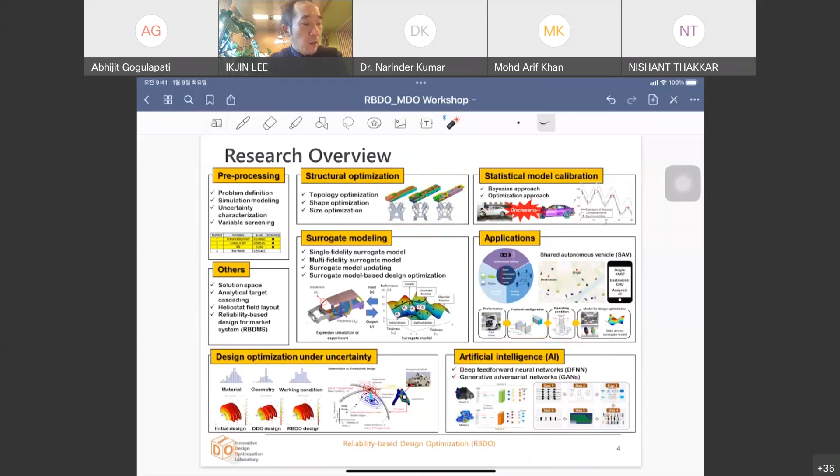But basically, we will focus on this design under uncertainty today. This overviews the RBDO process. When we perform RBDO, we need these four steps.

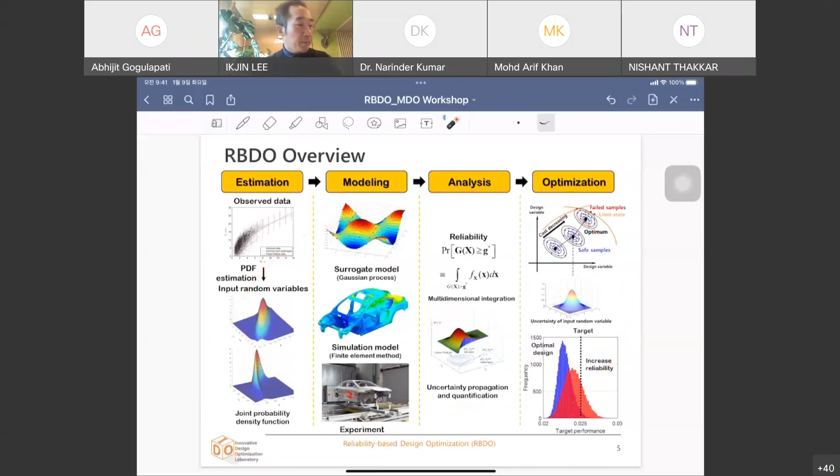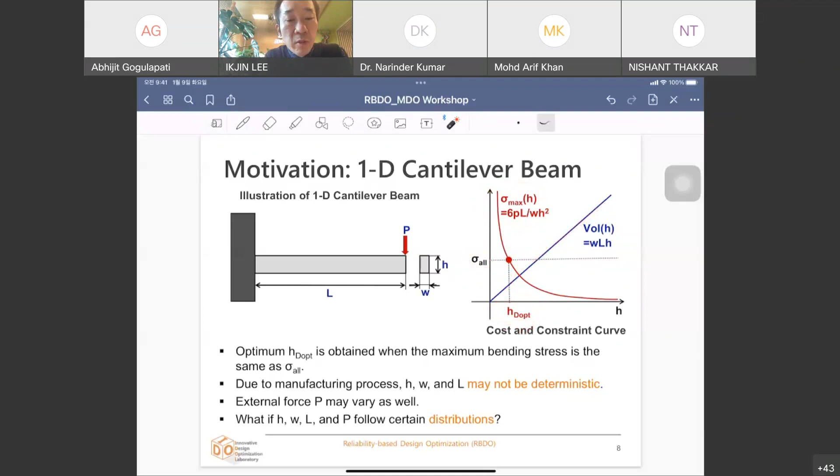However, due to manufacturing process, this H, or W, or L may not be deterministic. So even if we say H is like 1 centimeter, if we actually manufacture this beam, then the actual height could be different from 1. It could be larger than the target value, or it could be smaller. If the actual height is smaller than this target value, then the stress at that point is larger than the allowable stress, so that design is failed.

So in actual cases, what if this parameter or variable follows a certain distribution? If we assume this height follows a normal distribution like this, then this variable is called a random variable. Random variable means we can define a variable that follows a distribution. So here we have only one design variable H, and it follows this kind of normal distribution.

That means if we make infinitely many of this kind of one-dimensional cantilever beam, then 50% will be failure and 50% will be success. So this design has 50% failure and 50% reliability. The reliability of this product will be 50%.

So this is actually the motivation of RBDO. Reliability-based design optimization, RBDO, is necessary to satisfy a certain level of product reliability. 50% may not be enough for the reliability of this kind of product. So what if we increase this reliability to like 95% or 99%? Then how can we perform design optimization under that target? That's the purpose of RBDO.

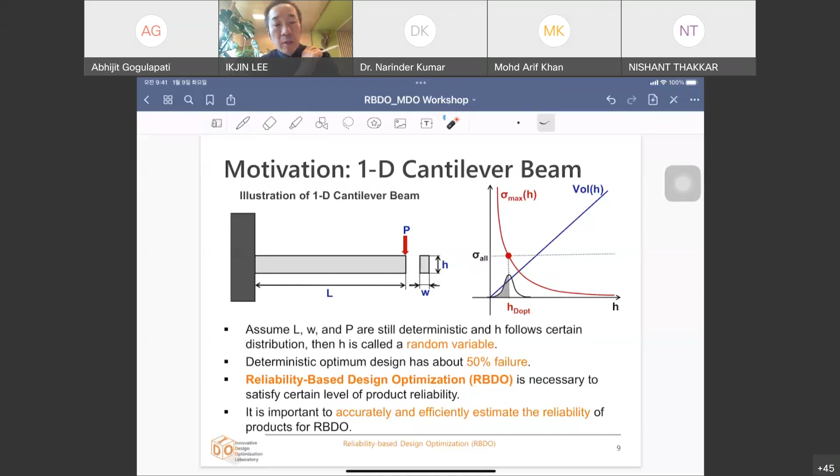To apply the RBDO concept in this one-dimensional cantilever beam, this is the current design. To minimize or reduce this failure, we know we have to shift this design to the right, meaning we have to increase the height of the beam so that the failure is reduced.

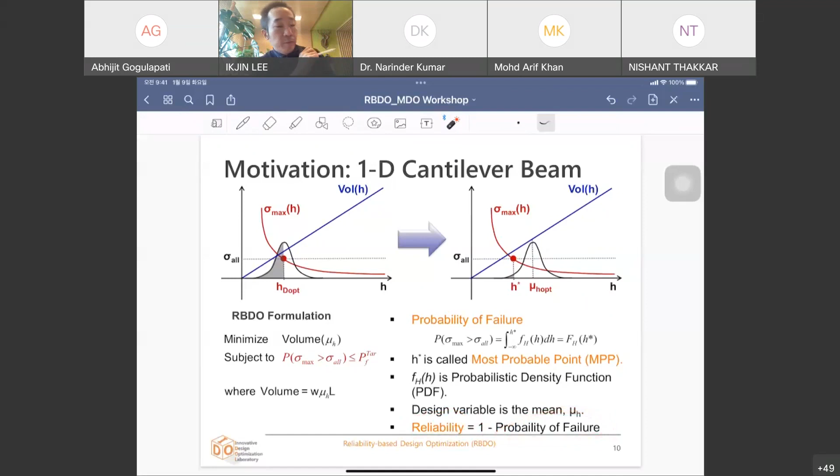So this is a one-dimensional example. We can easily obtain this as a one-dimensional, analytical problem. But for general application, we have to generalize this process.

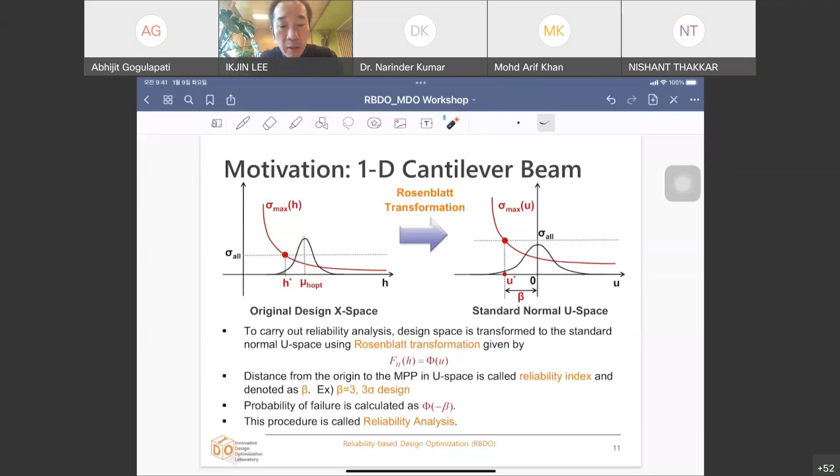So because of this kind of uncertainty existing everywhere, we have to consider these uncertainties to guarantee the target reliability.

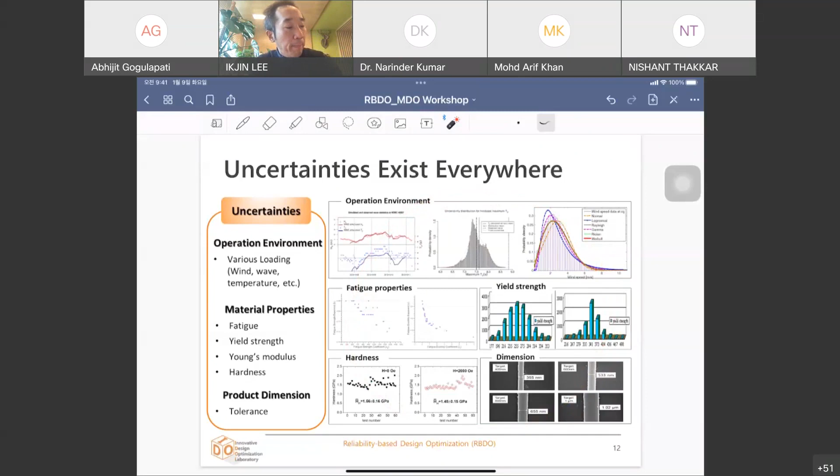This is just an enlarged figure from the previous slide. The fatigue strength coefficient and exponent, and the fatigue ductility coefficient and exponent, are uncertain - each coefficient or exponent follows a certain distribution. Also, these two random parameters are correlated, meaning when one increases, the other decreases. So they are correlated to each other.

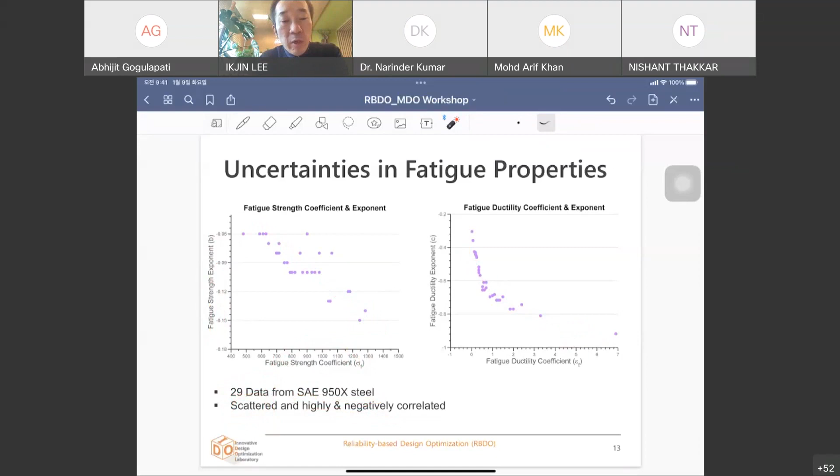This is actual data, 29 data points from this material, SAE 950X steel. We can see it is scattered and highly and negatively correlated. So we have to consider this correlation as well to obtain an accurate reliability estimation.

This slide shows that even if we don't consider correlation, the result could be different. We're dealing with the same fatigue material result. If we don't consider this material property correlation, the actual data, shown as a red dot, is different from the simulation result, shown as a gray line. But if we consider this material property correlation, the gray line and the red dot match each other. So we have to consider this correlation as well. In summary, we have to consider this statistical input property to accurately perform reliability analysis.

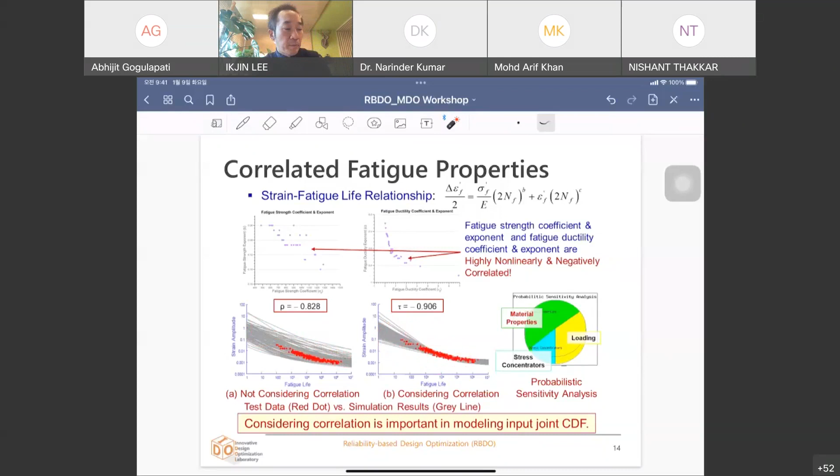This is a comparison between the safety factor approach and the reliability-based approach. The safety factor approach is a widely used design approach, while reliability is a relatively new design approach. To guarantee reliability, the safety factor approach introduces a safety factor or safety margin. This safety factor approach is a deterministic design approach, introducing a safety factor or safety margin to guarantee a reliable design.

However, the main problem of this approach is that the safety factor is obtained through experience. From experience, we can say we could use a safety factor of 3 for the design of this product. But if we have to design a new product, since we don't have any experience, we may not have an accurate safety factor estimation. In that case, we cannot accurately estimate the reliability of the product. This safety factor is not mathematically obtained, it is obtained by experience, so it doesn't guarantee the target reliability of the product.

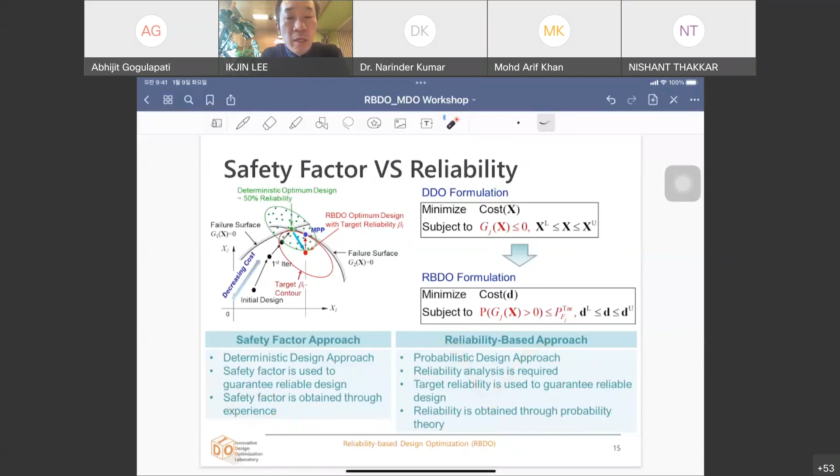However, in the reliability-based approach, we are using a probabilistic design approach, and reliability analysis is required. If this reliability analysis result is accurate, we can guarantee the reliability of the product. Target reliability is used to guarantee reliable design, and this reliability is obtained from probability theory, which means mathematically we can obtain this reliability, not from experience. So this is a more advanced, mathematically advanced approach.

Since we overviewed the motivation of RBDO, let's move to reliability analysis.

Concept of reliability analysis: let's consider this simple shaft example. When a performance function reaches a certain threshold - here performance could be stress, fatigue life, or other mechanical performances - if a performance reaches a certain threshold, the state of the component or system will change from safety to failure. This threshold is called the limit state.

If we use a threshold of 0 as a limit state, that means g of x, where g means performance function, g of x equal to 0 divides the random variable space into safe and failure regions. We define failure like this: if the performance function is greater than 0, the product is considered unsafe or a failure. So g(x) equal to 0 is called the limit state function. Here, 0 is the limit state, the performance function divides the space into two regions: safe region and failure region.

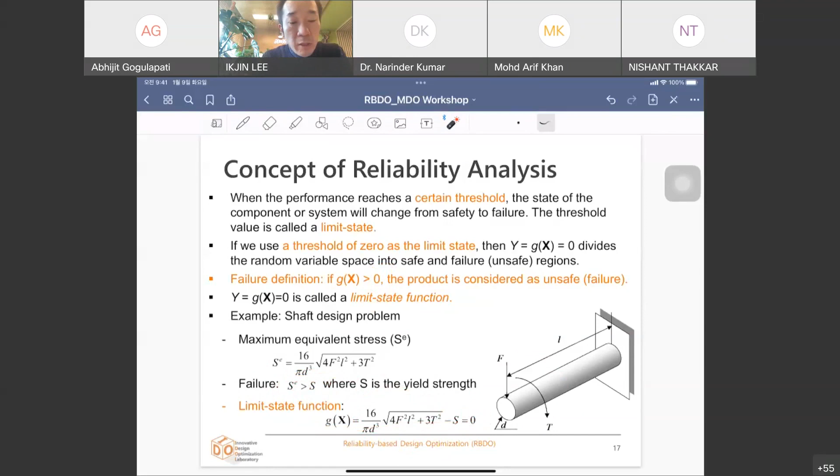For reliability analysis, we will use the limit state function. In the figure, this red line is the limit state function, and this red dot means the given design - meaning the mean value of two random variables, in this case external force and torque. We are dealing with a two-dimensional case here, where torque and force are random, and we assume these two random variables follow a certain distribution.

In this case, it could be a normal distribution. This is the limit state function, so here is the safe region and this area is the failure region. I think you're familiar with Monte Carlo simulation - if we know the input distribution and perform a Monte Carlo simulation at this given design, we may get this kind of simulation result. Most of the results fall in the safe region, but some results fall in the failure region, meaning there exists some failure.

Probability of failure, as I told you, is defined like this: the probability that failure occurs, where g of x is greater than 0. This probability is evaluated using multidimensional integration, assuming the input PDF distribution information is available.

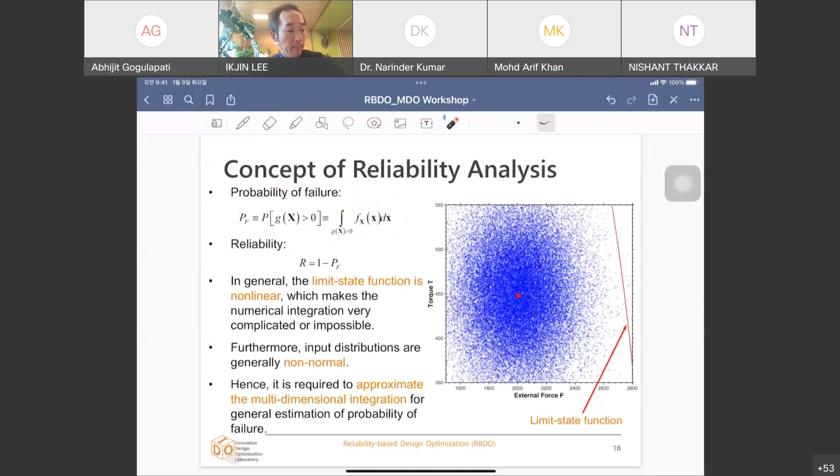As I told you at the beginning of the lecture, there are two ways of evaluating reliability. The first is the analytical method or MPP-based method, which includes FORM (first order reliability method), SORM (second order reliability method), and DRM (dimension reduction method). The analytical method always finds the MPP, and at the MPP, the limit state function is approximated linearly, quadratically, or using the dimension reduction method.

The second way is to use a sampling-based method, such as Monte Carlo simulation, like shown in the previous shaft example, to evaluate the probability of failure. To reduce the number of Monte Carlo simulation samples, we can use other sampling methods such as importance sampling or Latin hypercube sampling. There are many sampling strategies to improve the efficiency of Monte Carlo simulation.

There is also the method using surrogate models, but we will not focus on this one. Surrogate models are usually combined with sampling-based methods because Monte Carlo simulation requires a lot of computation—usually 1 million or more samples are required to accurately perform it. Since we cannot directly use an expensive computational model, we may have to introduce a surrogate model in a sampling-based method. But surrogate models are not the main focus of this lecture, so let's skip that one.

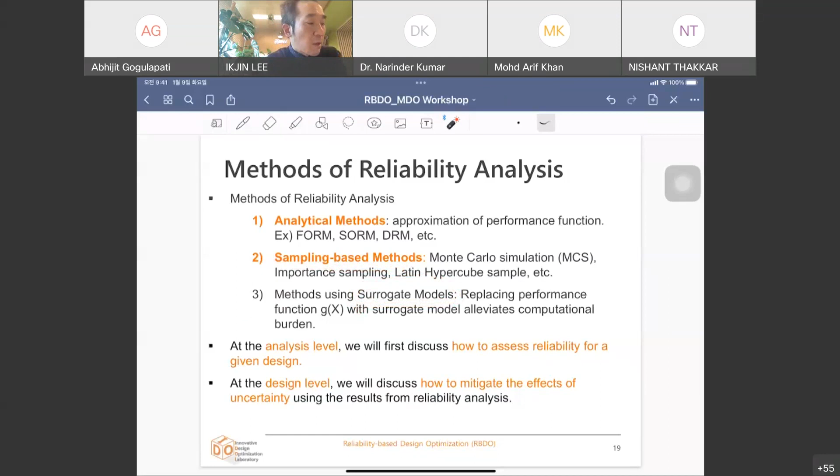So let's look at the first order reliability method. From the name, we can see we need to approximate a limit state function at the MPP using a linear function. Again, we need to perform this multidimensional integral. The basic idea of FORM is to ease computational difficulties by simplifying the integrand and approximating the performance function. So there are two steps: first, we need to approximate the performance function linearly, and also we need to simplify the integrand.

The integrand means the joint distribution function, so if it is not normal, we have to transform it into a normal space. FORM uses a first order Taylor series expansion of the performance function, so linearization is used in FORM. There could be two reference points for the linearization.

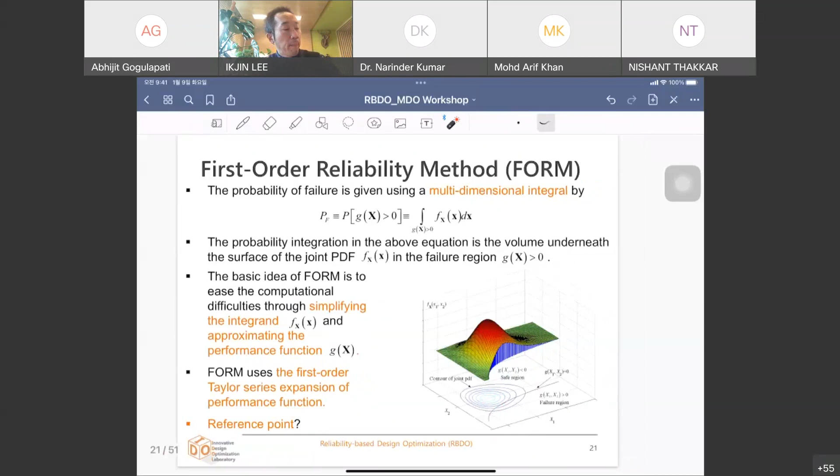The first point is called the mean point or design point, which is the center of the distribution. Another point is called the MPP, which was shown in the motivation slide. The MPP locates on the limit state function. The performance function can be linearized at the mean.

If we linearize the performance function at the mean, this is just a mean-based FORM. By using Taylor series expansion, the performance function can be linearized like this at the mean, so here this is a function of the mean.

Or the performance function can be linearized at a point on the limit state function, and this point is called the most probable point, MPP.

But before we linearize this performance function or limit state function—even if the performance function is linearized, the probability of failure cannot be estimated if the distributions of input random variables are non-normal. So the first step of reliability analysis using FORM is to transform these non-normal variables into standard normal variables using the Rosenblatt transformation. This is the first step of FORM: the Rosenblatt transformation.

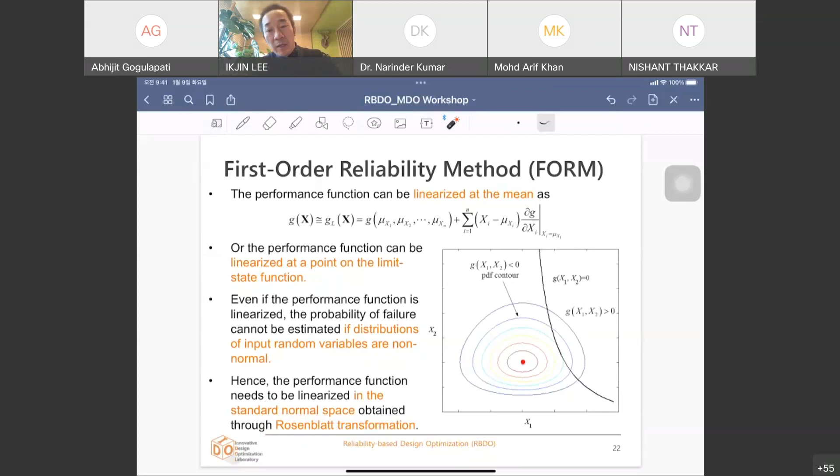So the first step of FORM is to transform input random variables in the original design space into a standard normal space. The X space, which is the original space, becomes U space, where all random variables are standard normal variables, meaning mean of 0 and standard deviation of 1.

This Rosenblatt transformation can be performed by equating two CDFs, the CDF of the original variable and the CDF of the standard normal variable. This works only for independent, statistically independent random variables. But in most cases, these variables are independent, so you can directly use this relationship. Then U becomes a function of X, or inversely, X becomes a function of U.

If the input distribution is normally distributed, like this notation for normal distribution, X follows a normal distribution with mean mu and standard deviation sigma, then this Rosenblatt transformation becomes a linear transformation. So U is a linear function of X.

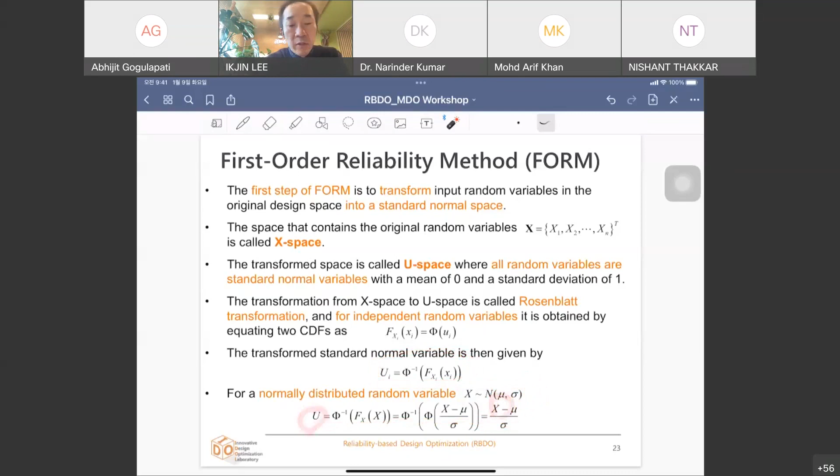After transformation, the probability of failure becomes a function of U. Previously, probability of failure was the probability that G of X is greater than 0. Now in the U space, the standard normal space, the probability becomes G of U is greater than 0, and all the design variables follow a standard normal distribution.

Here, lowercase phi means the standard normal PDF, so this is given and known. The important thing is that this Rosenblatt transformation doesn't change the probability of failure estimation, mathematically the probability of failure in U space is exactly the same as the one in X space.

Here you can see the original space. This PDF contour may not be a circle in this two-dimensional space because one of the random variables follows a non-normal distribution, in this case a log normal distribution, so it's not symmetric along the x2 direction.

But in U space, since all the random variables follow standard normal distribution, we could see that this is an exact circle. The contour becomes a circle since the mean value is always the origin and the standard deviation is 1 for both variables, U1 and U2, so the radius is identical.

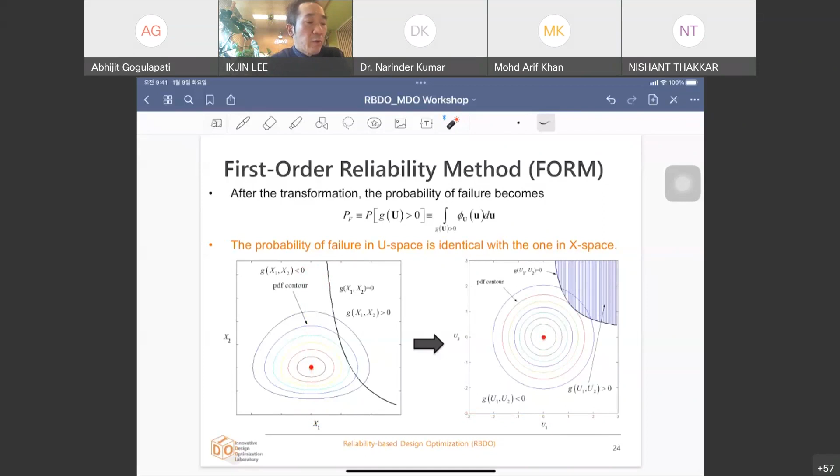So we're done with the Rosenblatt transformation. The next step, the second step of FORM, is to linearize the performance function in U space using the first order Taylor series expansion.

We could select two different ways of reference points: one is the mean value point, which means the origin of the U space, or a point on the limit state function, MPP. Depending on which point is used for a reference point, the probability of failure estimation could be different.

If we select the mean value point, then the probability of failure estimation result could be erroneous, but it requires less computation. But if we select MPP, a point on the limit state function, then the probability of failure estimation could be relatively more accurate than the mean value method, but it requires additional computation to find this point.

Searching for the point on the limit state function requires additional computation, as I mentioned. That means the MPP approach is generally more accurate than the method using a mean value point. So by spending more computation, we could obtain a more accurate probability of failure estimation.

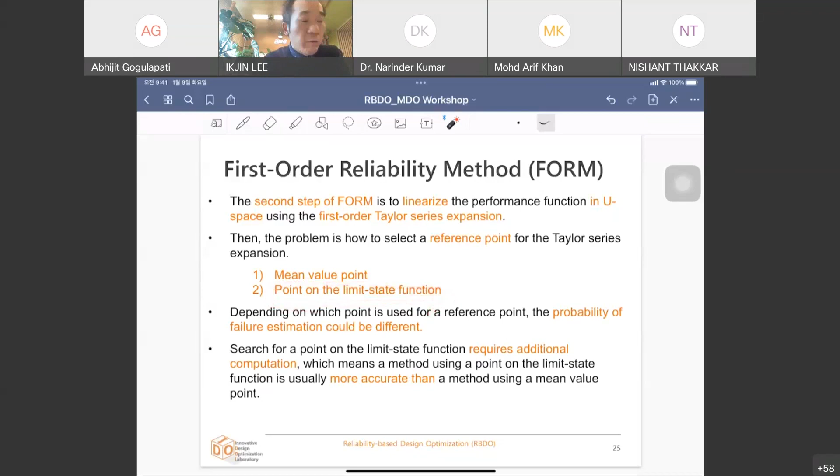The performance function can be linearized at the mean in U space. Mean in U space means the origin of the U space, so this becomes 0 in the U space. Then the linearized function at the mean is simplified like this.

If we know this, then we can obtain the mean of this linearized function because we know the mean of the input, and the mean of the sensitivity is also available. The mean of this linear function is simply the function value at the mean, at the origin, and the variance, or square of standard deviation, is obtained as the summation of coefficient squares, where the coefficient is the gradient or sensitivity at the mean.

Then the probability of failure using FORM at the mean is approximated like this. Probability of failure is defined as the probability that failure occurs, approximated using the linearized function, so G is approximated using the linearized function. Using the symmetry of the distribution, this is the same as 1 minus the probability that this function is less than 0.

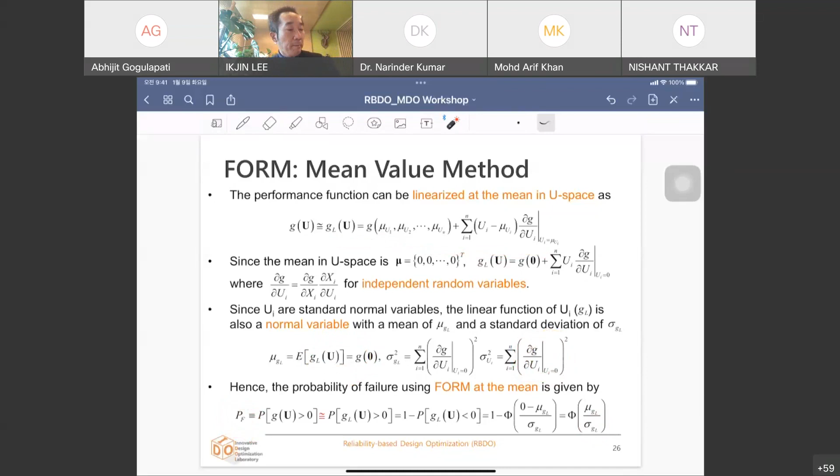But again, this mean value method has some error since we are using mean as a reference point. So we may have to have a more accurate form than the mean value method.

So we want to put this reference point U star on the limit state function. Then we can approximate again using a linear function like this, but the reference point now is a point on the limit state function. So later we will find this is MPP.

Then in a vector form, we could have this. But since this point is on the limit state function, this value will always be 0. So we will have this linear function.

And to minimize the accuracy loss, it is natural to expand the limit state function at a point that has the highest contribution to the probability integration. So it is important to select this point on the limit state function, and we will select this point which has the highest contribution to the probability integration. So which means we want to maximize the PDF value at the point.

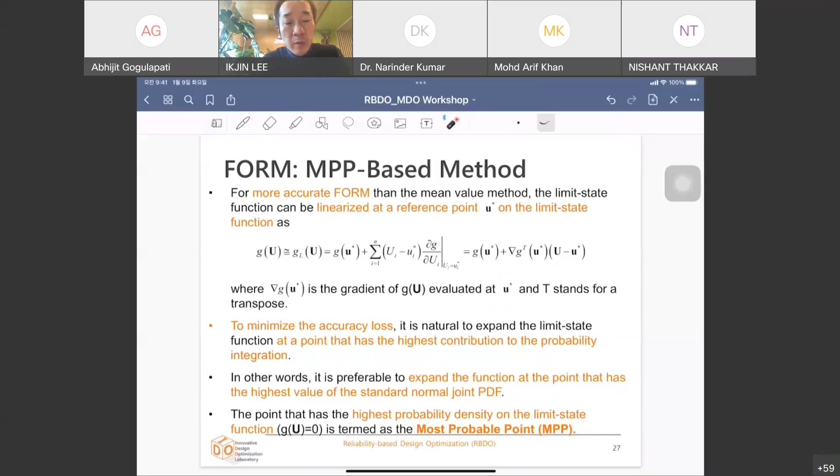So it is preferable to expand the function at a point that has the highest value of the standard normal joint PDF. That means we need to perform another optimization to obtain this MPP U star point. And again, this point is called MPP, which has the highest probability density function value on the limit state function.

So that means we need to perform this optimization to locate the MPP, which means we need to maximize the joint PDF of the standard normal U variable while satisfying this, which means the point must be on the limit state function. So among all the points on the limit state function, we want to find the point that has the largest joint PDF value.

And this joint PDF function can be expressed using this exponential function. So that means maximizing this function corresponds to minimizing this.

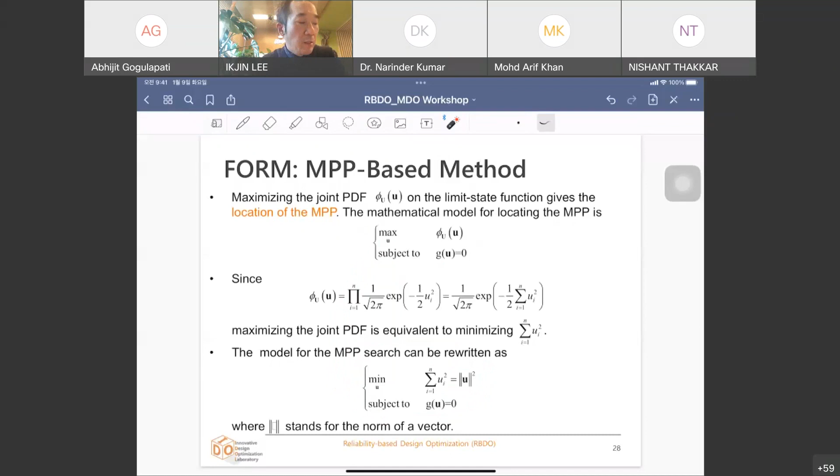So the model for the MPP search can be rewritten as this. Since minimizing this is the same as minimizing the distance from the origin to the point, which means the L2 norm, this formulation is equivalent to this formulation, which means we want to minimize the distance from the origin to the limit state function. Then that point is the MPP point, or most probable point.

So here, graphically, we can see this easily. We want to find the point on the limit state function, and among all the points, we want to find the point that has the shortest distance from the origin to the limit state function. Then that point is called MPP, or most probable point, and the distance from the origin to the limit state function is called the reliability index. So we will use this reliability index for probability of failure estimation.

So it is very important in FORM how to find this reliability index, which means how to find this MPP on the limit state function.

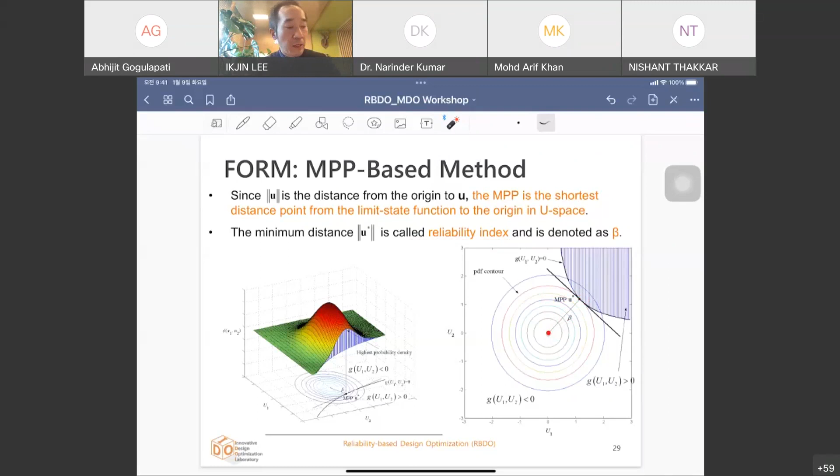And mathematically, once we find this MPP, the probability of failure is simplified as capital phi of minus beta. Beta means the reliability index, which is the distance from the origin to the point. So once we know the distance beta, the probability of failure can simply be written as capital phi, meaning the CDF value of the standard normal variable evaluated at minus beta. So regardless of the shape of the limit state function, because we are linearizing, the probability of failure is given as a function of reliability index beta.

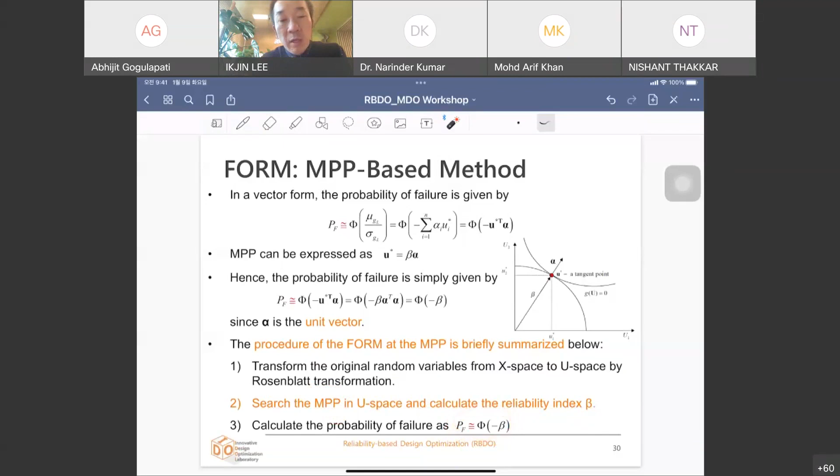So the procedure of FORM at the MPP is briefly summarized like this. First we need to transform X space to U space by Rosenblatt transformation, and we need to find the MPP in U space, which has the shortest distance from the origin to the limit state function. Once we find the MPP, we need to obtain the reliability index by measuring the distance. Then the probability of failure is simply given by this. This result will be more accurate than the mean value based method.

So let's summarize the first order reliability method. To approximate the probability of failure, the linearization of the performance function is used. For a reference point, we can use mean or MPP. And before linearization, we first use a transformation, so called Rosenblatt transformation. And the mean value method is more efficient but less accurate than the MPP-based method.

In other words, the MPP-based method is more accurate than the mean value method, but more expensive. Expensive means it requires more computations. And then the probability of failure is estimated as this, which is a function of reliability index beta. But due to linearization, FORM contains inevitable error for nonlinear performance functions. So if the performance function is not that nonlinear, FORM shows a relatively accurate result.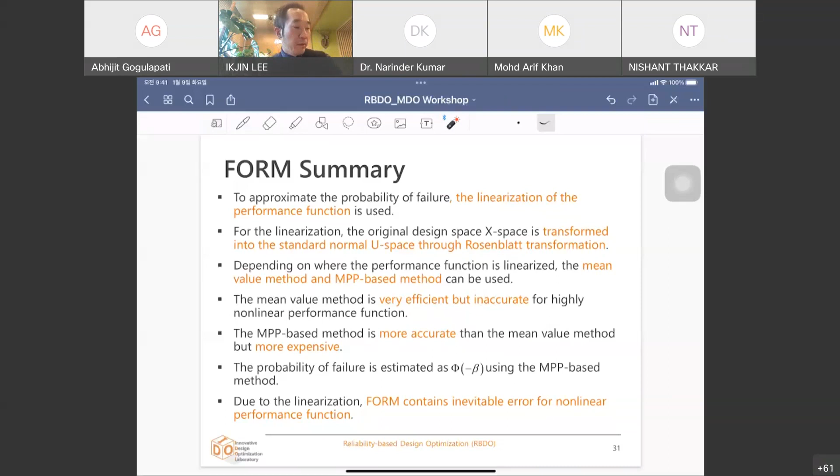And let's move to sampling-based reliability analysis.

So we saw this is a definition of probability of failure, and this can be rewritten as this: probability that X, any point in X space, belongs to the failure domain. That means this is a multidimensional integral of the indicator function I times the joint PDF. Using the definition of the expected operator, this becomes expected value of the indicator function. The indicator function is defined like this: if X belongs to the failure domain, it is 1; otherwise, meaning X belongs to the safe domain, it is 0. And the failure domain is again defined like this: G of X greater than 0 is failure.

Then using Monte Carlo simulation, the probability of failure can be evaluated like this, by counting the failed samples, all the failed samples divided by all the Monte Carlo simulations. So this ratio is the probability of failure. We can just count the number of samples which fall into the failure domain and divide it by total number of samples, then we could obtain the probability of failure.

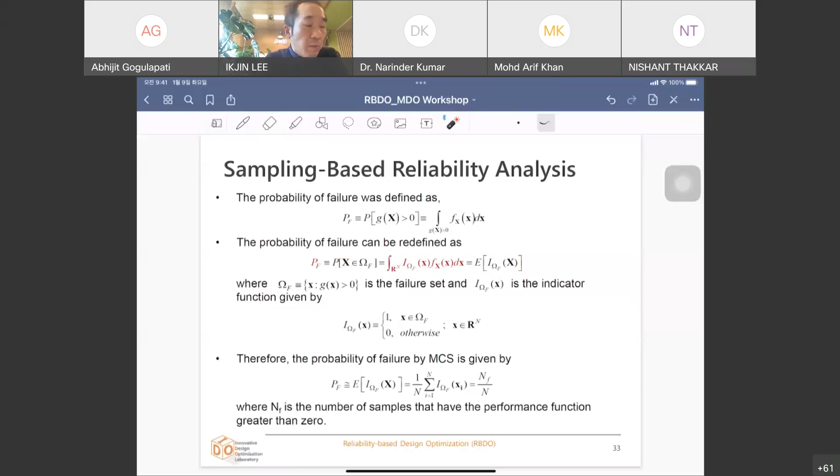So error in this Monte Carlo simulation is because of the number of Monte Carlo simulation samples. If we have infinitely many samples, there will be no error in estimating probability of failure. However, because of computation limits, we cannot have infinitely many samples. In that case, we can introduce a surrogate model, but this approach may have some error in surrogate modeling.

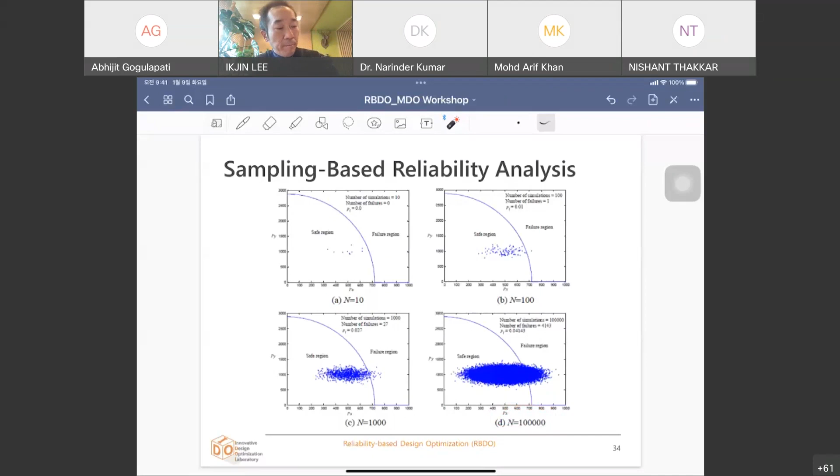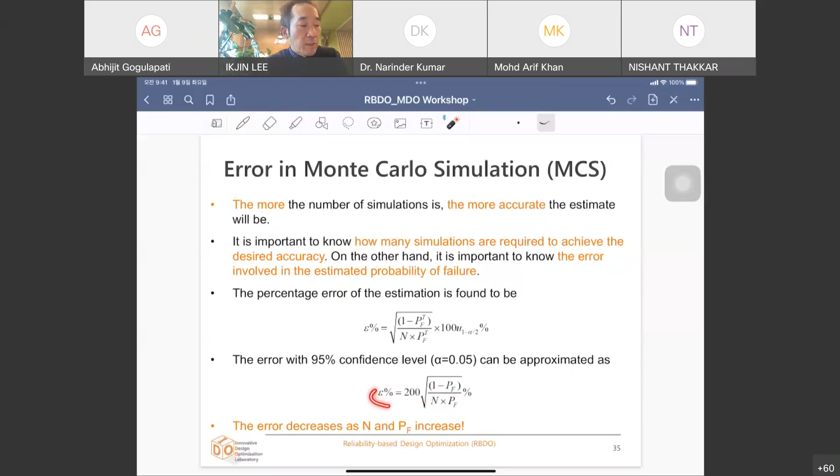Also, if we have a very large PF, this error also decreases significantly. In other words, if we have a very small estimated probability of failure, we need a very large number of samples to have the same error level.

So this is the end of reliability analysis, and we'll move to reliability-based design optimization.

So again, the concept of RBDO is like this. Deterministic design optimization may have only 50% reliability at the optimum because of the uncertainty of dimensions or material properties, and so on. So this is not safe.

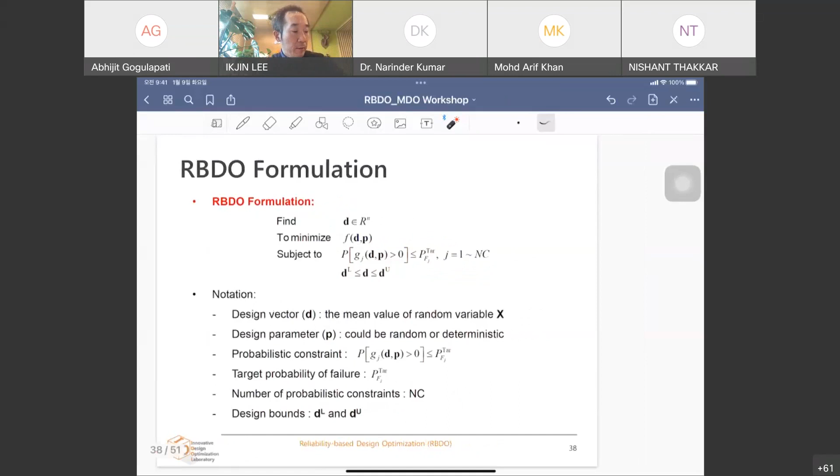Then using FORM, first order reliability method, we could rewrite the RBDO formulation, since this probabilistic constraint can be simplified if FORM is used. First we write the target probability of failure as this, using target reliability index beta t, which is given by the designer. Then using FORM, the estimated probability of failure is expressed using the estimated reliability index, as we studied in previous slides. Then the probability constraint becomes capital phi of minus beta, the left-hand side, less than or equal to capital phi of minus beta t, the right-hand side.

And capital phi, which is the CDF, is an increasing function, so that means minus beta is less than minus beta t, which becomes beta greater than beta t. So we could rewrite this formulation like this, and this becomes a deterministic design optimization.

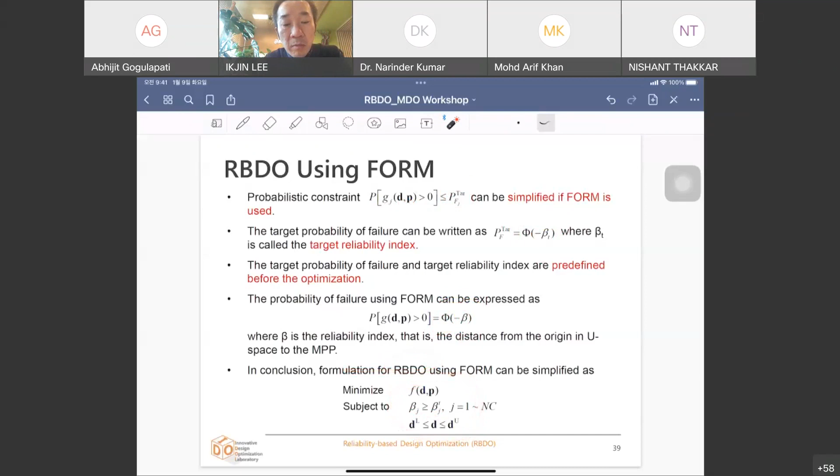Sometimes inverse reliability analysis is more efficient than reliability analysis for design optimization. In reliability analysis, we perform optimization where we minimize the distance from the origin to the point, subject to being on the limit state function. But in inverse reliability analysis, we change this objective function and constraint function.

We want to maximize the performance function subject to this constraint, which means on this circle, we want to find the point which maximizes the performance function. This maximum point belongs to either the safe design or the failure domain. If it belongs to the safe region, the design is safe. If this point belongs to the failure domain, then the current design is a failure.

So for performing RBDO, we may not obtain the reliability analysis result directly. Instead, we could perform inverse reliability analysis. The inverse reliability analysis result is just to check whether the given design is safe or not. We don't need to obtain an accurate reliability analysis result.

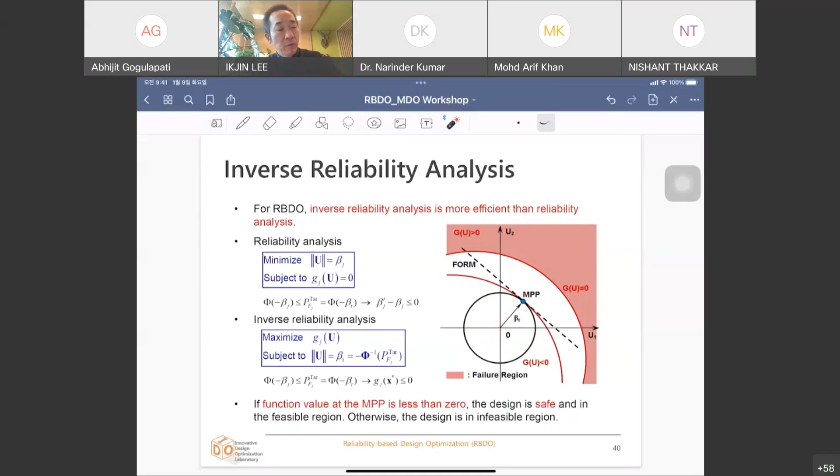In most cases, inverse reliability analysis is more computationally efficient, because the size of the MPP search space affects the efficiency of the MPP search. This means if the current design is far from the limit state function, reliability analysis requires more computation to locate the MPP on the limit state function. But inverse reliability analysis always finds the MPP on this hypersphere with target reliability index beta t. So in many cases, if the current design is far from the limit state function, inverse reliability analysis is more efficient.

So usually we use inverse reliability analysis for RBDO. In that case, the optimization formulation is written like this: minimize the cost function while satisfying that the function value at the MPP is less than or equal to zero. And this MPP is obtained from inverse reliability analysis.

For performing design optimization, we need sensitivity information, and the sensitivity of this probability constraint is easily obtained using the sensitivity at the point. So this doesn't require additional computation for obtaining sensitivity.

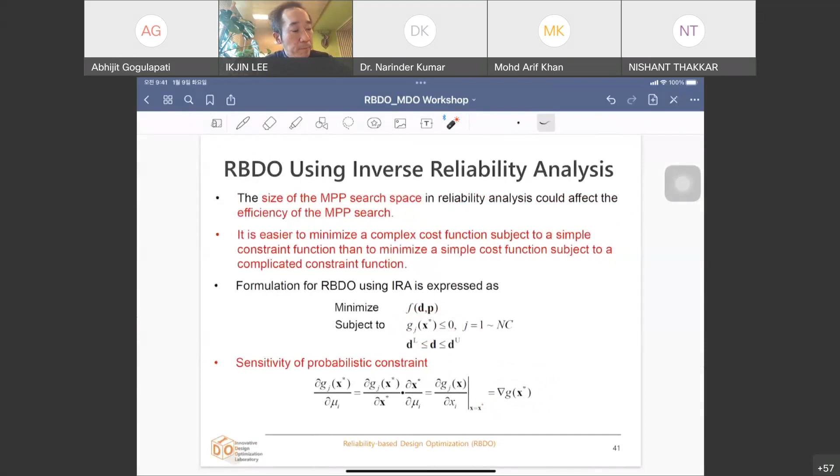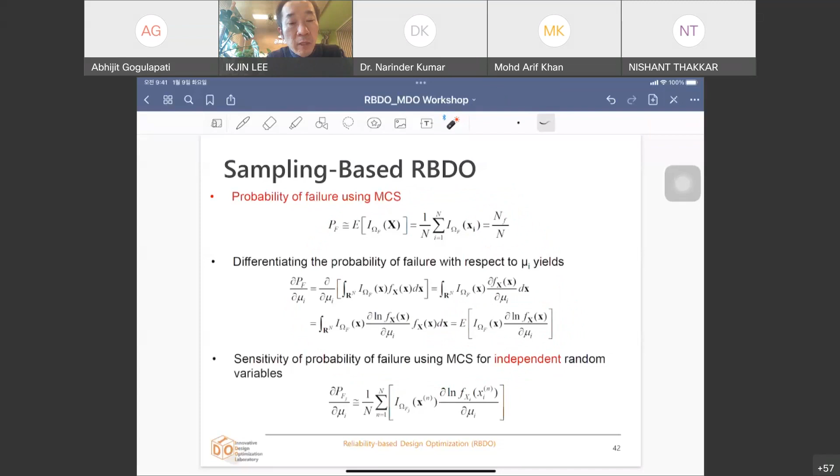So this is the end of the concept of RBDO, and I will give you two engineering examples of how this RBDO works.

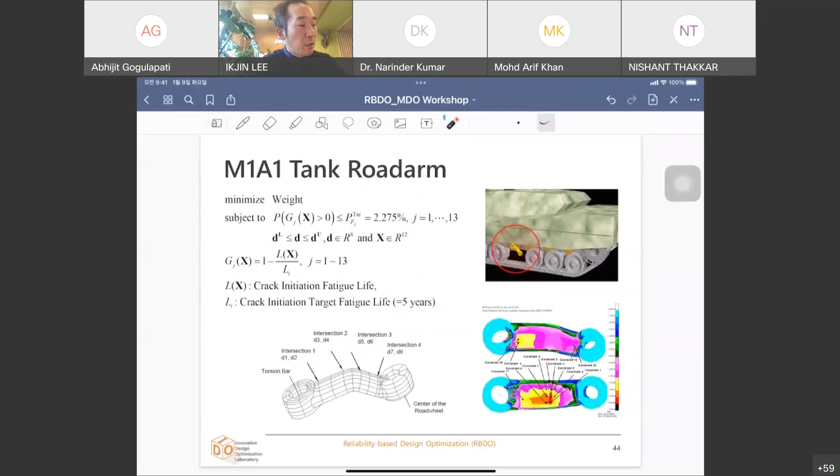Here the constraint is fatigue life. L of X is the crack initiation fatigue life. To obtain this, we need to perform fatigue analysis, and we select candidate points by performing durability analysis. The crack initiation target fatigue life is 5 driving years, so the crack initiation fatigue life should be larger than this 5 driving years with 1 minus 2.275% reliability. That's the objective of this formulation.

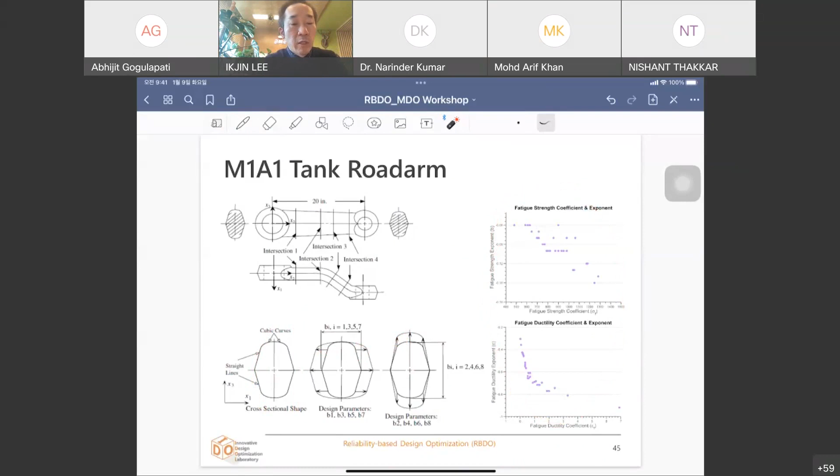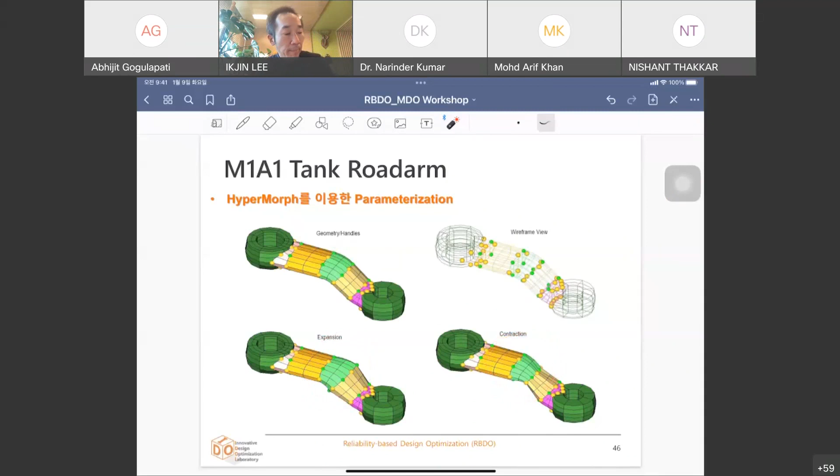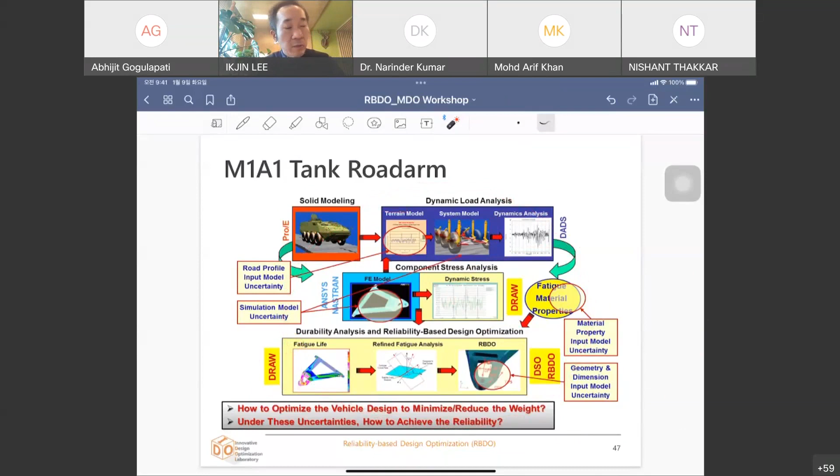To perform this example, many software tools are used, like Pro-E for solid modeling and dynamic analysis, fatigue durability analysis, and the design sensitivity and RBDO codes developed by myself and my seniors. DRAW is the durability analysis code. Combining all these software to evaluate fatigue life and perform reliability analysis and design optimization, we could obtain this kind of results.

Initially, the weight is this, and this is the initial design. If we perform deterministic optimum, then we could reduce this weight by about 10%. But again, this deterministic optimum design could have only 50% reliability.

So we could perform RBDO using two ways: MPP-based RBDO, so FORM, and sampling-based RBDO using Monte Carlo simulation. We can see almost the same results obtained using each method. By increasing the deterministic optimum result a certain amount, we could satisfy target reliability, which is 97.7%. By comparing these two results, we can see this part is thickened and this part is narrowed, so we could see the design is changed.

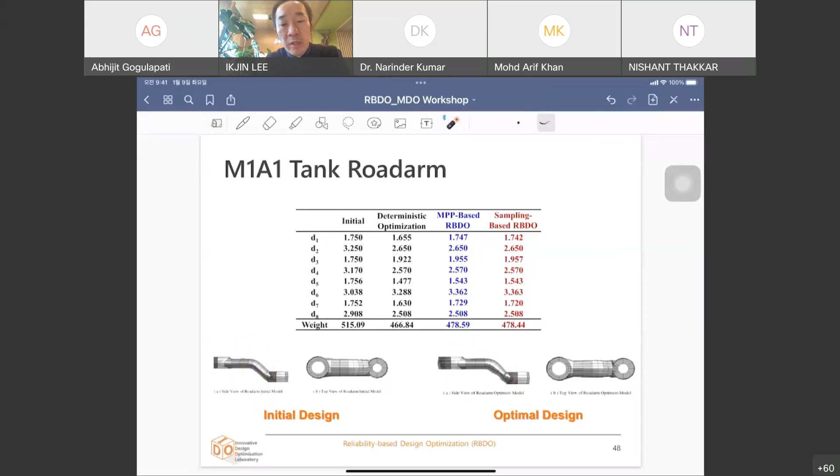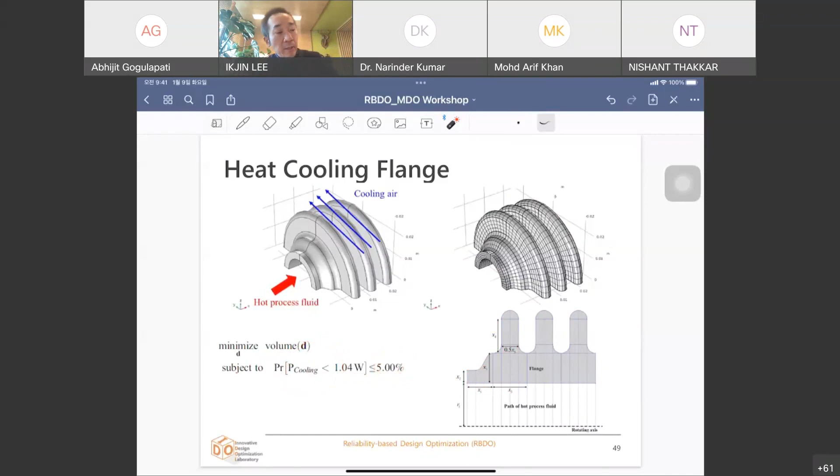We want to satisfy this cooling performance, and the target probability of failure is 5%. We can compare three designs: original design, deterministic optimum, and RBDO optimum. Here you can see the deterministic optimum reduced the volume a lot, but the probability of failure is almost 50%, so half of them fail due to uncertainty.

But if we increase this volume a little bit, like this much, then we could satisfy the probability of failure like this. Here this probability of failure is different from target because we are using a first order reliability method, which involves a linearization error. We see a 5.5% error, a little different from the 5% target probability of failure. You could see the initial design, deterministic optimum design, and the RBDO optimum design.

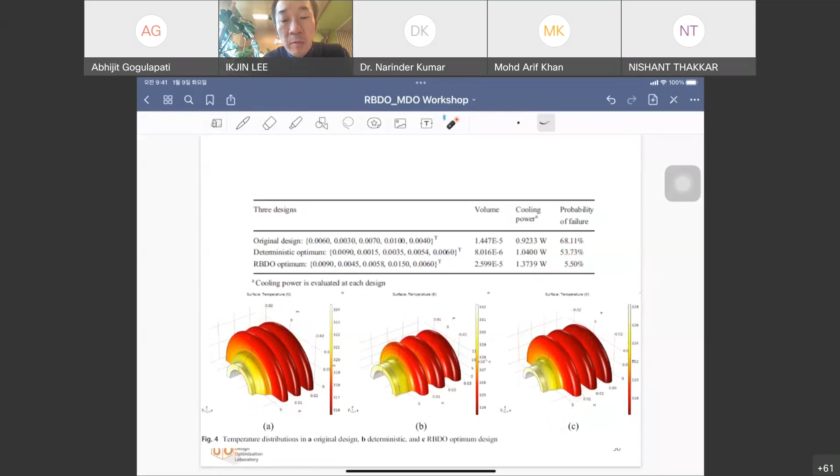This is it for my lecture. If you have any questions, please let me know.

So Professor Lee, I had a question. In your slides, you mentioned the safety factor based approach versus the probability based approach. Now, the safety factor based approach depends on experience and is more ad hoc or arbitrary, right? Whereas the probability based approach is more rooted in mathematics and there's a procedure for it.

Now, when you calculate sensitivities, is there a procedure to check what happens or how the sensitivities behave when you change the distribution? For example, if you choose a non-Gaussian distribution, is that part of these kinds of studies? Because the distributions are not always Gaussian, from what I understand. I don't work in these kinds of areas, so I'm just...

Usually we just assume distributions are Gaussian or normal distribution. In that case, many problems are solved very easily. But even if they are not Gaussian, if we use a Rosenblatt transformation, we can make all the inputs Gaussian. But assuming non-normal input variables as normal distribution, we could obtain different results because we had a wrong assumption, right?

Right. The design itself is not that different, but the calculated probability of failure could be very different because it is very sensitive to the location of the design. So correct input estimation is very important.